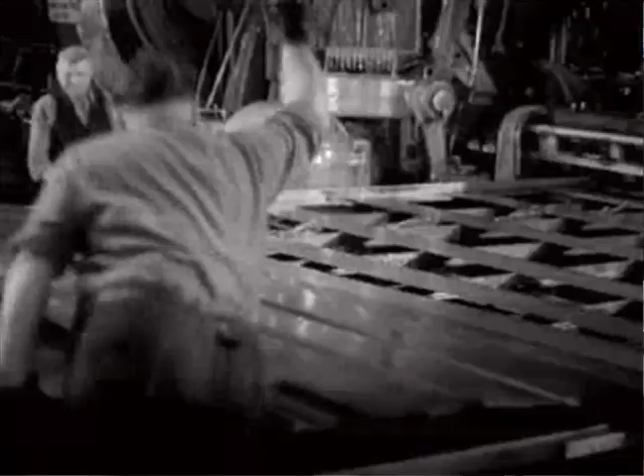Most people think of manufacturing from back in the days when you had to have unions because everything was a sweatshop. It was dirty, it was grungy, you were practically chained to a machine. That's not today's manufacturing.

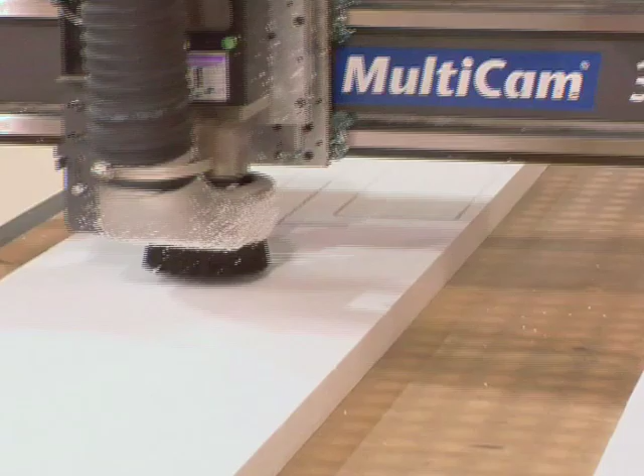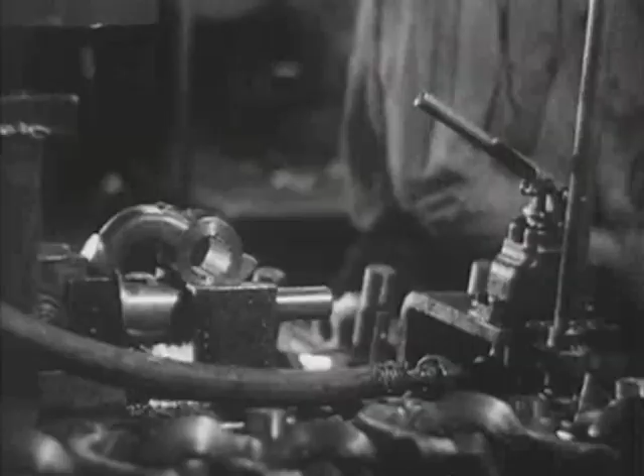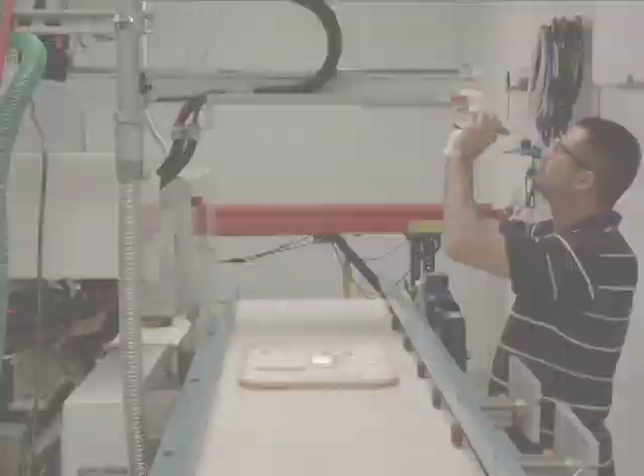A lot of people seem to think of it in a very old-fashioned way, as dirty factories with jobs that aren't very challenging for people's minds, and I would say it's very much not that anymore. Today you're going to see shops that are clean. We're producing very, very tight tolerances, and you can't do that in a dirty environment. When I say tight tolerance, you know, you can take your human hair and split it maybe 5 or 10 times, and that's what we're manufacturing to.

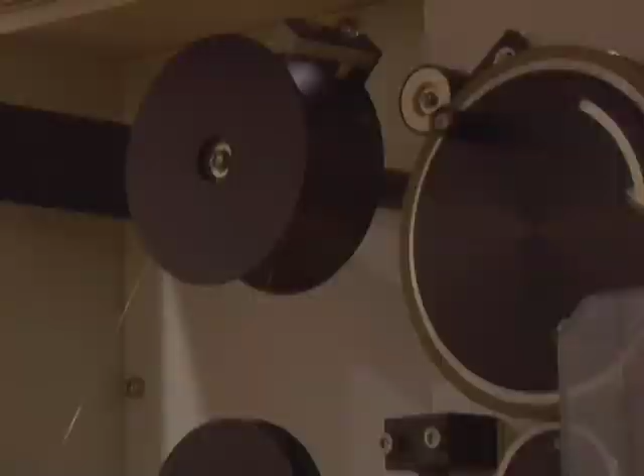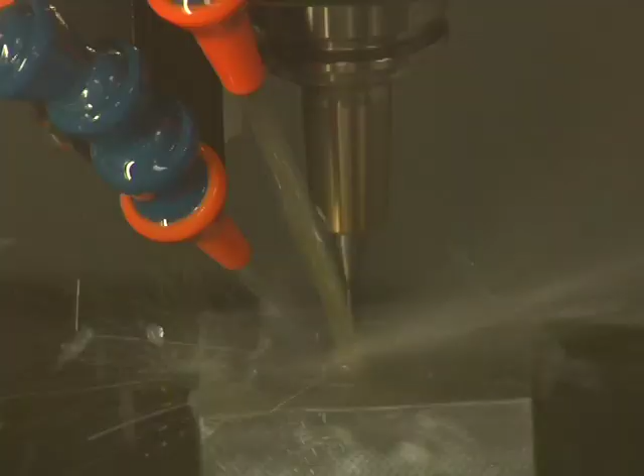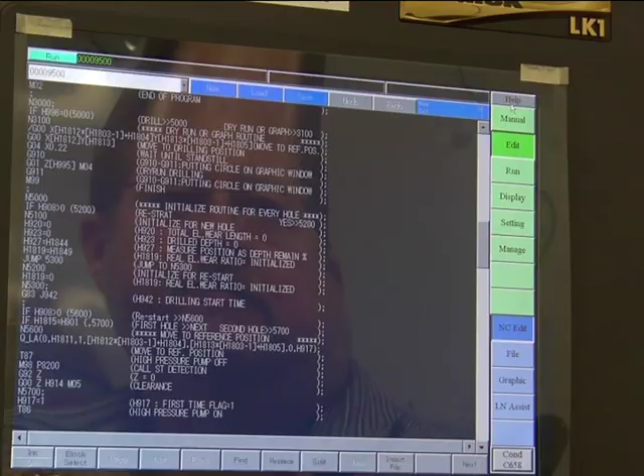There have been many advances in technology in the last 20 years, such as computers, robotics, and materials. If you take all these advances that are available to us and combine them with traditional manufacturing processes, you have advanced manufacturing. Advanced manufacturing, by definition, is going to basically be a better way to do something. It involves making things by methods that use people's minds more than their hands in a lot of ways. Advanced manufacturing allows us to produce a product at a lower cost with better quality and greater consistency.

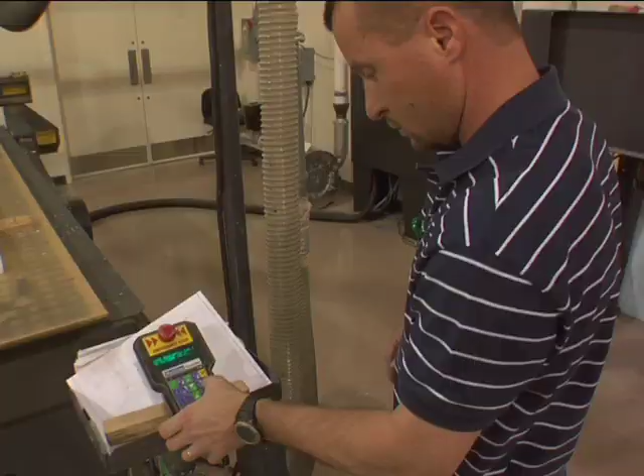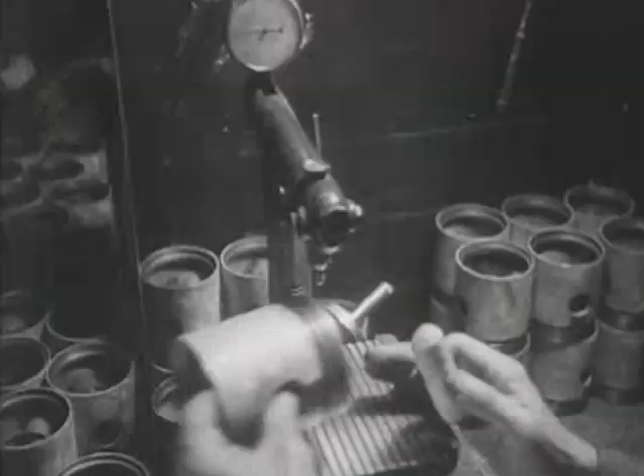In doing so, you're going to have workers that can do a higher skill level than, say, our grandfathers. Our grandfathers were very good manual machinists. They never touched a CNC machine. They could produce a certain amount of work, and it was quality work, but it was still only a certain amount. It's also just working with your hands and making things, taking them apart, understanding how they work.

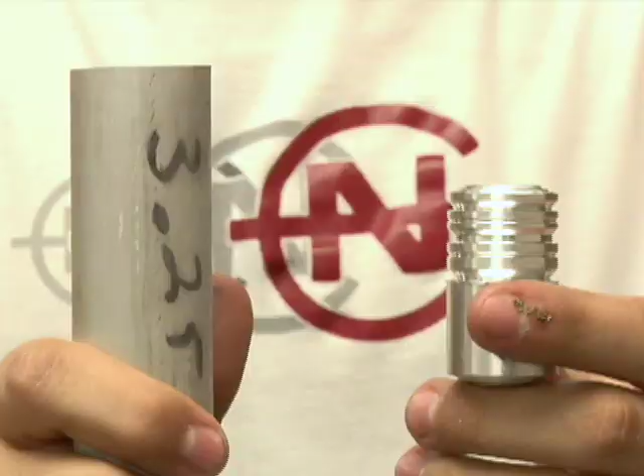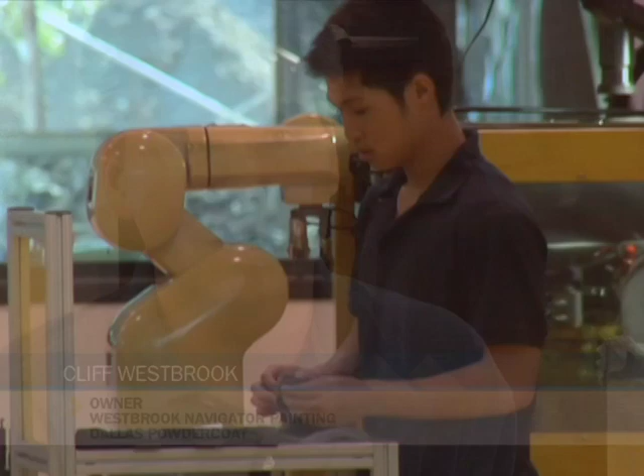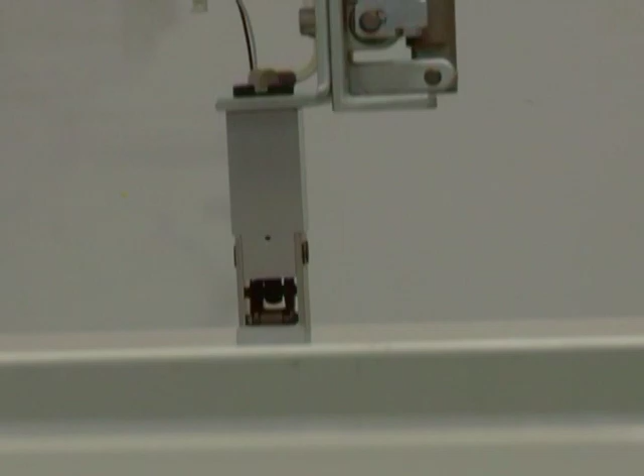The technology is always changing, and that really started or was standardized in the mid-'80s. Robotics really started coming into play at rudimentary levels in the 1980s, and then in the 90s they progressed to a level that it really became practical to see them in modern manufacturing. You're trying to take a very redundant task and automate it as much as possible to free a person up from having to do the same thing over and over again.

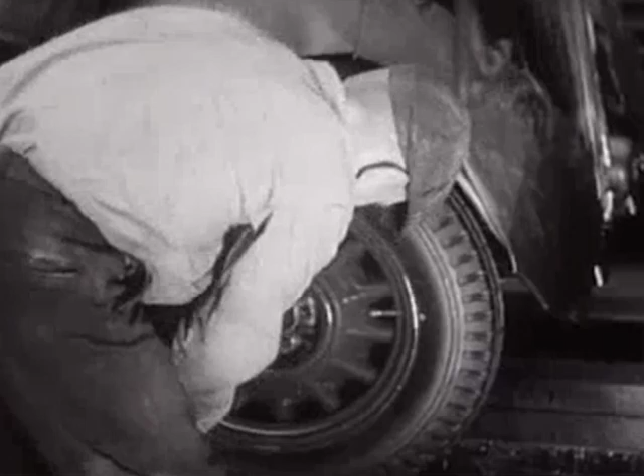Like look at General Motors or Ford or any of the automotive manufacturers. You don't see them putting tires on cars anymore on the assembly line by hand, with somebody struggling with the tire and putting it on. Instead, they have robots that do it all. It does it faster, it does it efficiently.

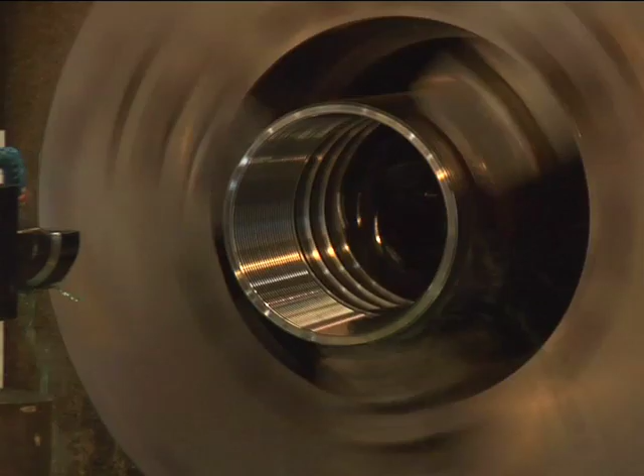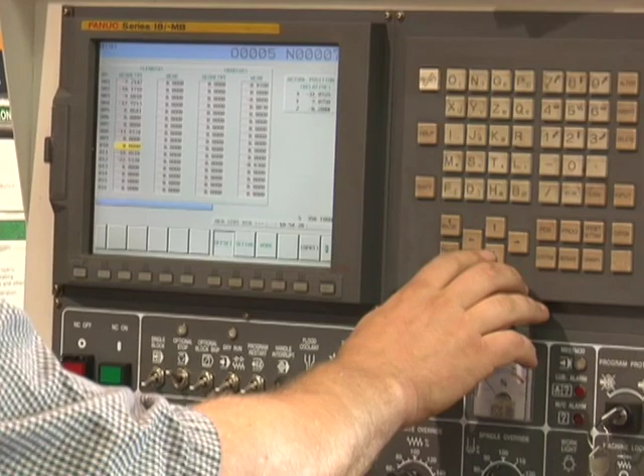There are a wide variety of jobs in manufacturing. You can go into programming, materials control, operator roles, or inspection. There are so many opportunities. College skills are very good if you want to advance. You will learn some things in college and you'll learn a lot more in your workplace, but the better foundation you have to learn things in your workplace, the more likely you are to advance.

What we're trying to do by switching to offering the Manufacturing Skill Standards Council certifications is transition from a traditional metal shop into an actual manufacturing curriculum. And there's obviously a salary increase there as well. Getting the certification is going to help you get the job in the first place, because the company will know that you know what you're doing.

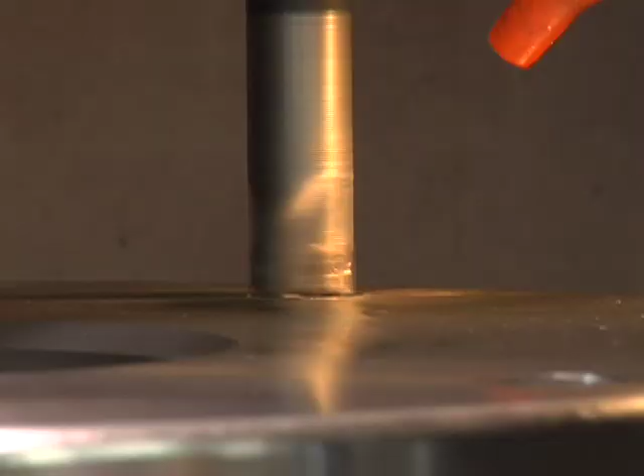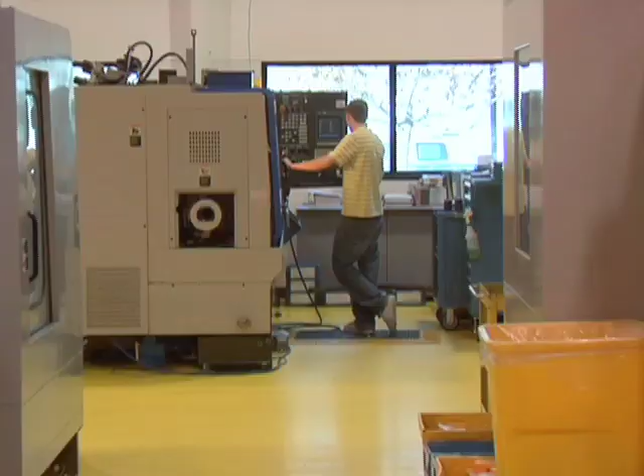So within manufacturing there are subsets, with people who more or less specialize in one area. We want people who are willing and interested in learning the other steps along the way. When we hire somebody, we look at several skill sets depending on where they might be needed to work. You've got to be quick with your mind, you've got to do a lot of math. But if you like math, you'll like this, it's fun.

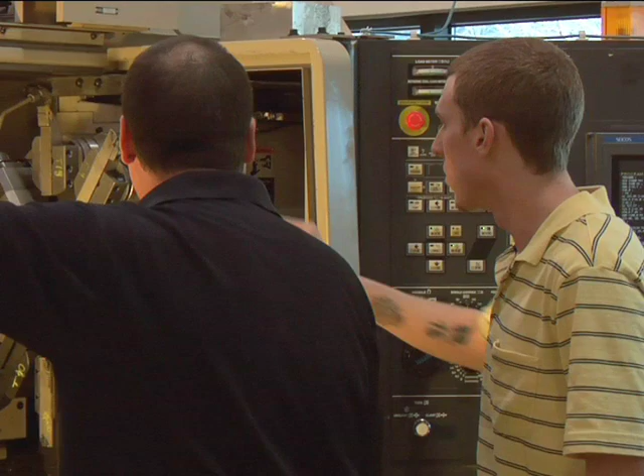One skill set that everyone has to have is the ability to work as a team, the ability to be at work on time, and the ability to follow instructions. It helps a lot when you have knowledge of playing around with computers and software, because aside from the engineering knowledge, most of the tools you use are computerized tools. These are all good springboards for people who want to advance their career in this segment of our industry.

Life is always going to be more fun if you get to see a lot of different things, a variety. You don't want to just work in the same nook, the same way, day after day after day. You want to learn things. It will keep you interested for a very long time, I would say. There's always something new to do.

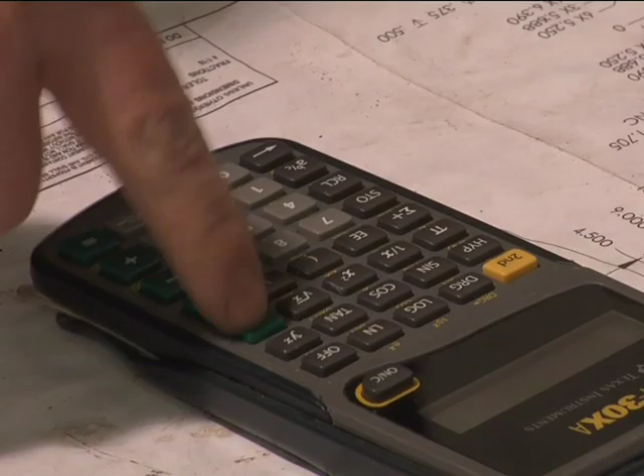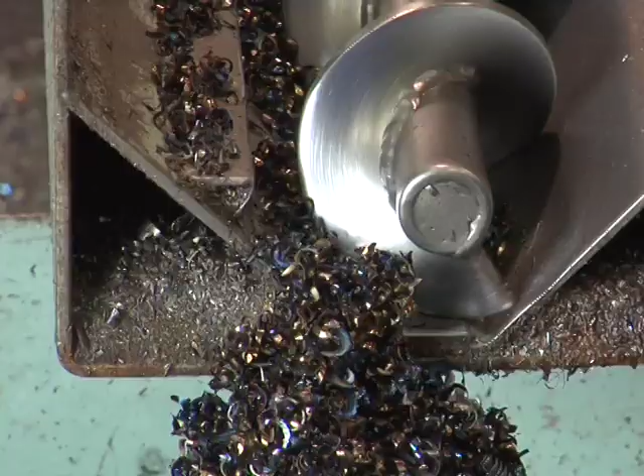You're going to need somebody that's got decent math skills, but they need more than that. They need basic programming skills with the computer, because what's going to be utilized is a different language, and nobody's going to come in with that exact language knowledge. I would suggest to parents that they encourage their kids to stay in school and learn as many skills as they can. Nothing's going to replace enthusiasm, because you can teach almost anybody anything if they want to learn it.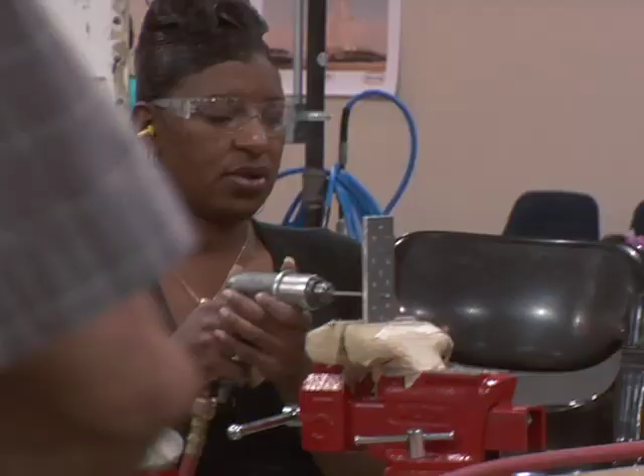Typically, somebody right out of school who's a total trainee is going to make $12 or $13 an hour. Somebody who has several years under their belt and the ability to set up and run a CNC machine on their own is going to be in the $15 to $18 an hour range. And once you get into some of these specialized fields that require a higher level, you'll see people making up to $30 to $35 per hour.

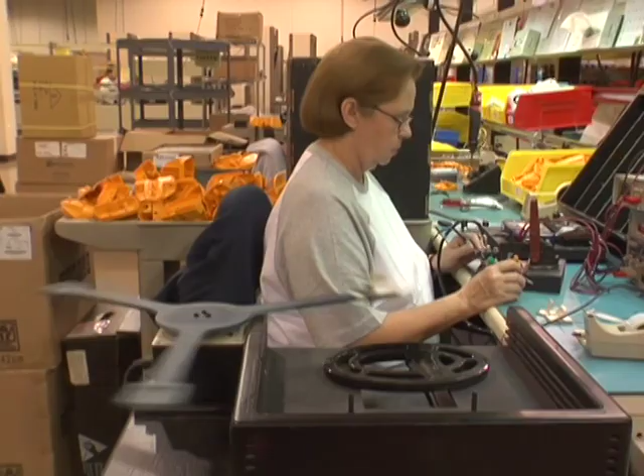I do believe manufacturing is important. The U.S. economy traditionally was built on a manufacturing base. We see manufacturing going offshore, but what we have to remember is there's always something that we can build or put together in the United States. So there will always be a manufacturing job. We just have to adapt to the needs.

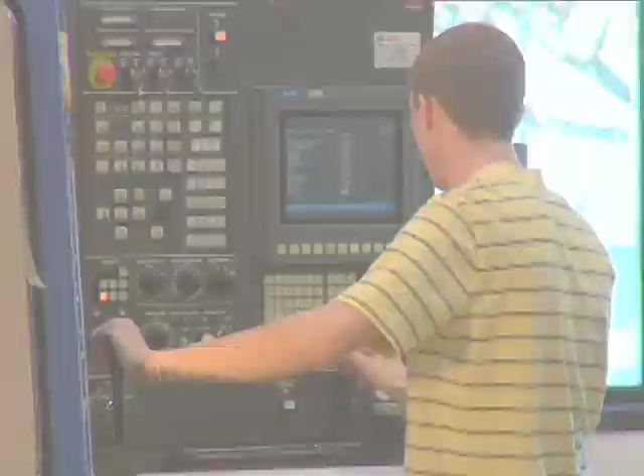Manufacturing's always been appealing to me because you get to see the end result. You ship something out the door, you wave goodbye, you've accomplished something that is going to benefit somebody. You get the sense of the final product in your hands, the sense that what you did actually yielded something tangible and physical, and you're holding it in your hand.

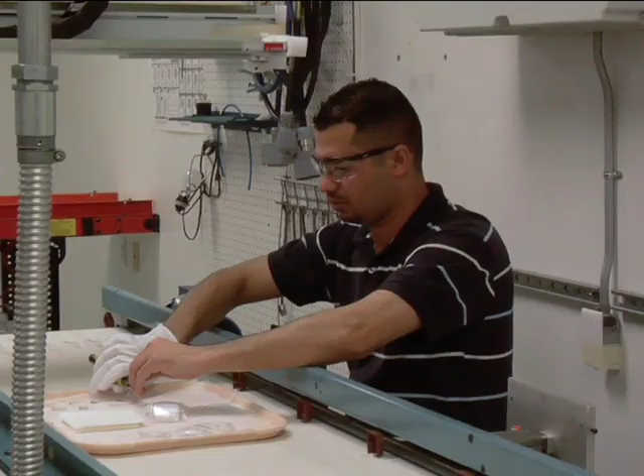I'm an engineer, and watching things being put together, having a personal input on something that's either going to make a person safe or make a person happy, is a very satisfying thing to be involved with. Manufacturing is a great industry to get into because it's America. That's just what we were built on. While it's not for everybody, it is for some, and it'd be nice if we could show them what manufacturing really is today.